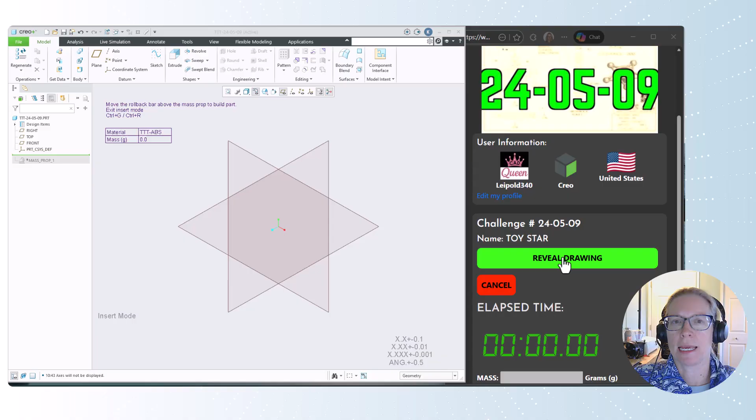Welcome back to another Too Tall Toby modeling challenge, and we are going to do this Toy Star. It is a tier 4 challenge. Let's jump right in. So today we are going to do an extrude, we're going to do a revolve, we're going to do a sweep, a mirror, and a pattern. A little bit of everything.

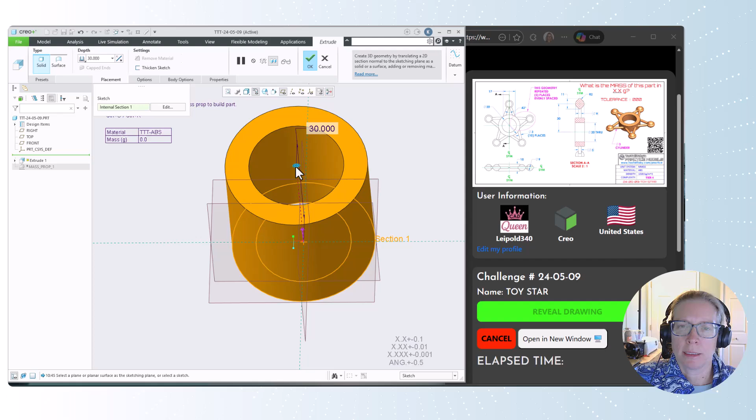So let's get our double circle shape here. The center is 20, the outside is 30. And let's make that a symmetric extrude of 10. That value is in my front view here.

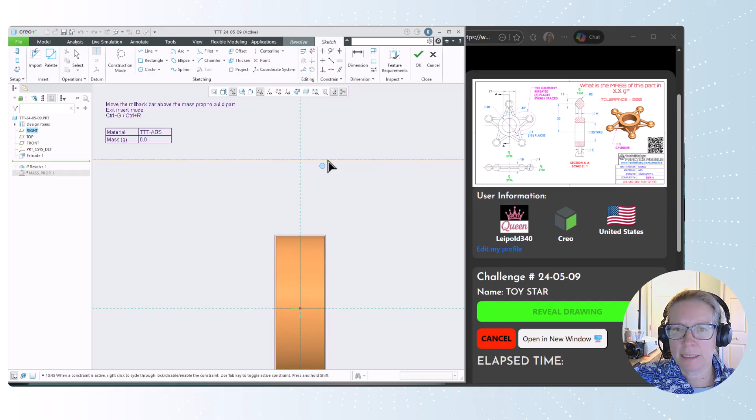And let's get into our revolve. So we're going to create a revolve on the right plane, cutting through here. And I'm going to use shift to drag and add my axis of revolution here horizontally above my horizontal axis by a distance of 30, shown out here on the right hand side. So that's my revolution. My geometry is going to be a circle with a diameter of 9.

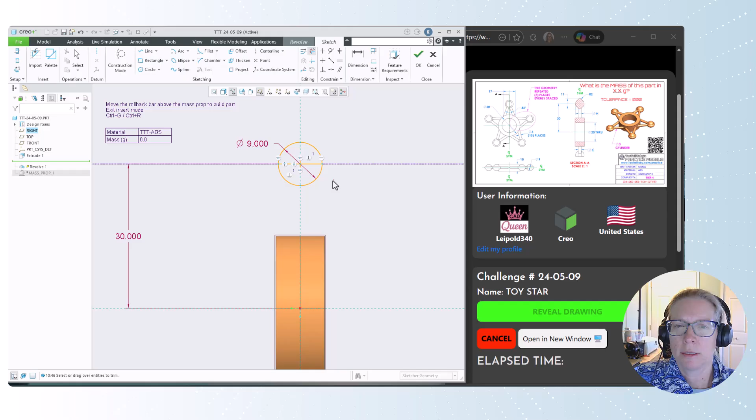I do have to close the loop with a single line, so we can do that. Trim off the bottom. And then I'm going to add a center point arc here to kind of get the geometry that I'm looking for. And I want the radius of that to be 2. I'm going to trim off the stuff on the inside. And the dimension that I'm looking for is 11. And 11 goes from this point out here to the opposite point.

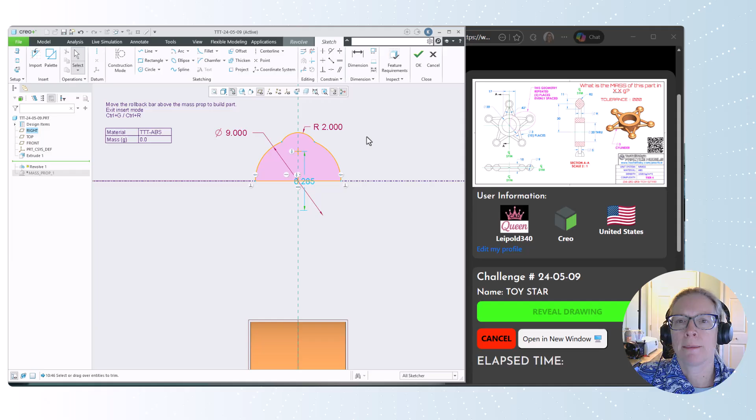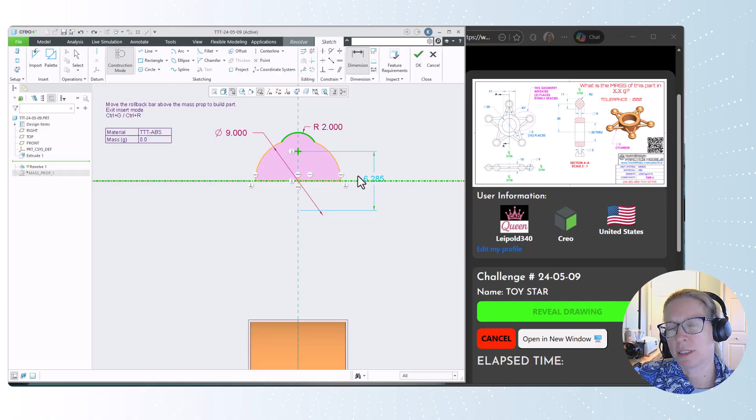So a couple of ways I can think about that. There is a way to dimension that. A lot of times it'll give you those diameters. But let's talk about what if we did a construction mirror. Oh, it didn't let me do it. I was hoping that would mirror in construction mode. Okay. Let's dimension from here to the center line. So that would give me essentially half the distance, but I want the full distance. So if I go back out and then middle click, I get the full distance. So you're kind of doubling your measurement selection. All right, so we got this great lemon Saturn looking shape here.

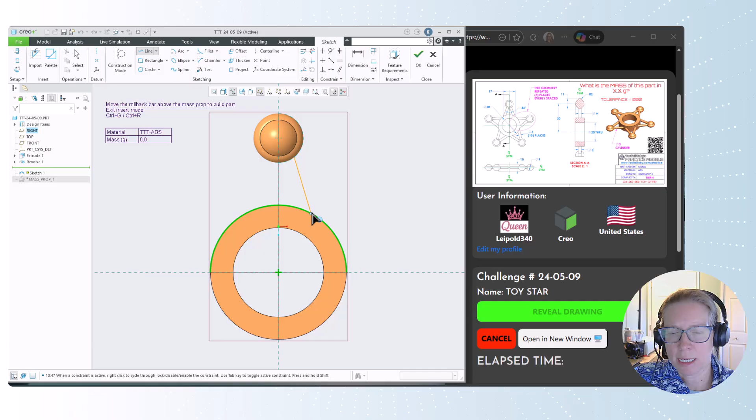All right, let's create our trajectory on the front plane for this sweep. And we know from the dimensions of the sweep, it's a line that goes from the top revolve to the extrude. The angle outside to outside is 42, so I'm going to make this 42 divided by 2. Okay, and then we know where it hits the extrude, we have this dimension of 17. So I'm going to go for my vertical reference to the outside and make this 17 divided by 2.

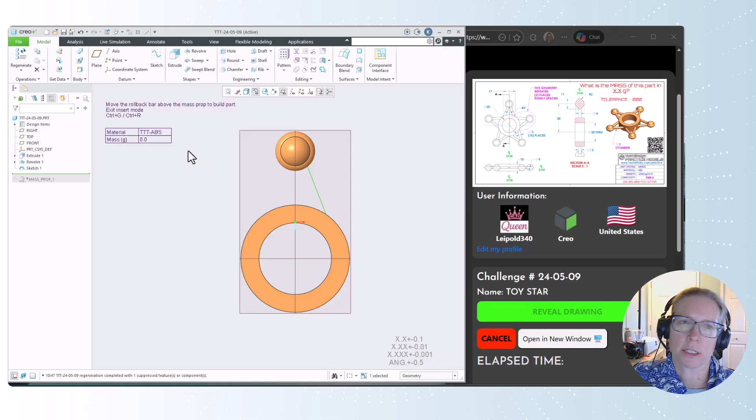Okay. All right, so as I get into using this path to make the leg of the star shape, that is going to be a sweep following this path. I want to flip the end. I want to sketch at the other end. So if I go details, options, I can hit flip here. That works. All right, and I'm going to create a sketch, and it's showing me exactly where that origin would be.

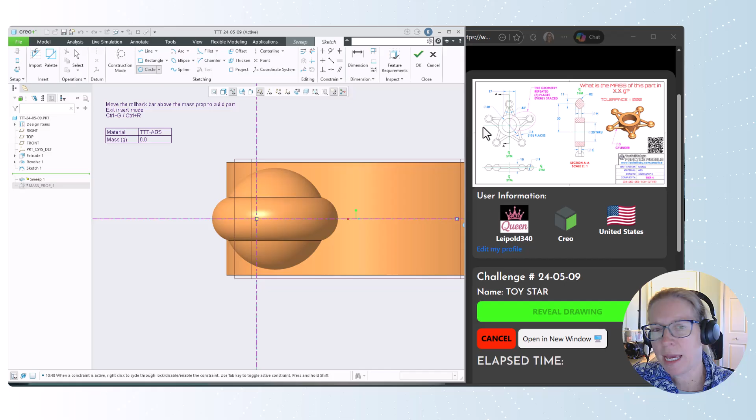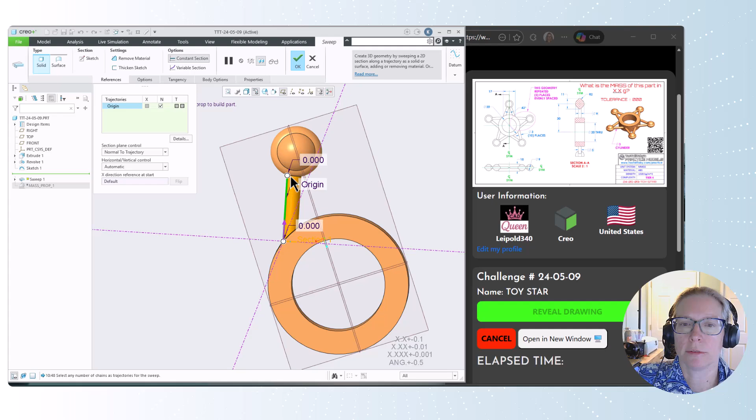Now remember, I drew the outer path, so I don't want to place this centered on it. I want to make it tangent with that diameter of 3, right? So it says here I've got a diameter of 3, but it's going to follow, you can kind of see a little better there, the outside of that path. Okay. So that looks pretty good. It's off a little bit though. It's challenging to see, but we have this little tiny kind of unfilled area up there.

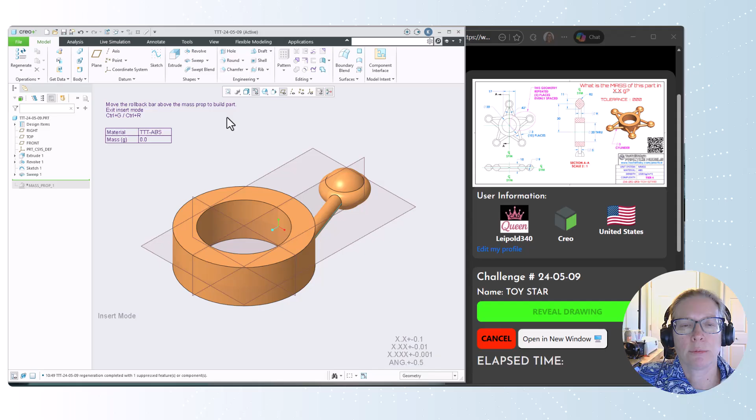So we have an option called merged ends, and merged ends extends your sweep shapes until they're wrapping around what they connect to. So that's what we want. Let's hit Control D. Okay, and we'll take that sweep and we will mirror that over the right plane.

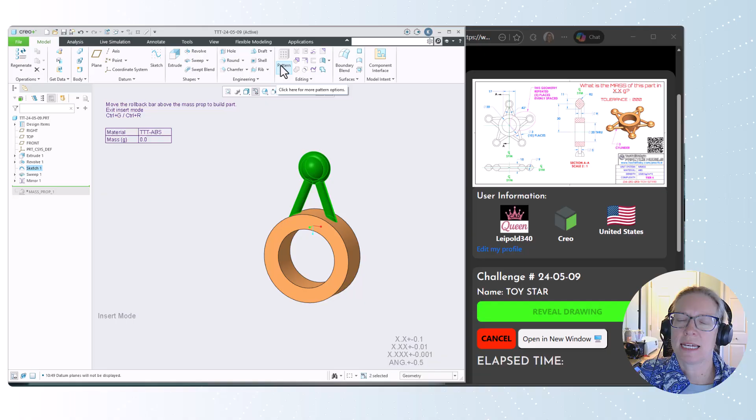All right, we're going to take a look at 2 different ways to create this pattern. So one, I'm going to hide my planes and I'm going to select the top geometry there. And notice that the pattern tool is not available because that creates patterns of a selected item. And this is multiple items. But I can do a geometry pattern, and geometry patterns are acceptable for geometry that's not going to vary a whole lot. So in this case, I can make 5 instances that fully go around 360 degrees.

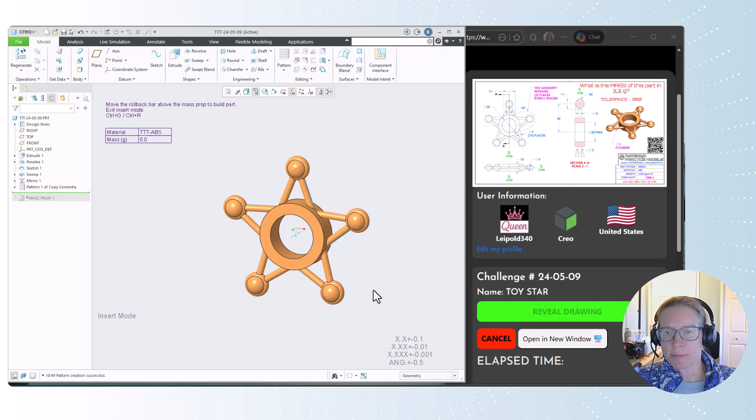Okay, so that is my end geometry. Let's see how we did. And we're going to type that in down here. And we did pretty good. Awesome.

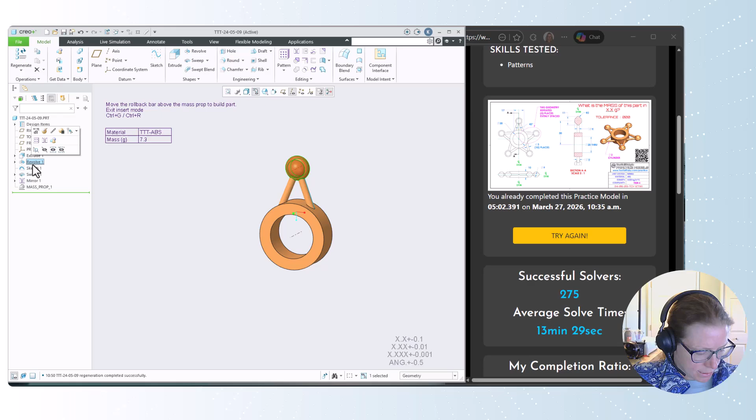So the other way to do it, if we want to use a pattern of a feature, which would give us something a little more stable, we can delete the pattern of copy geometry, although I do like how this leaves my original geometry existing. It's not considered part of the pattern. Okay. So again, the pattern requires multiple instances of a selected item. So right now, these are lots of things that went into that. So we have those 4 things that all went into making that geometry.

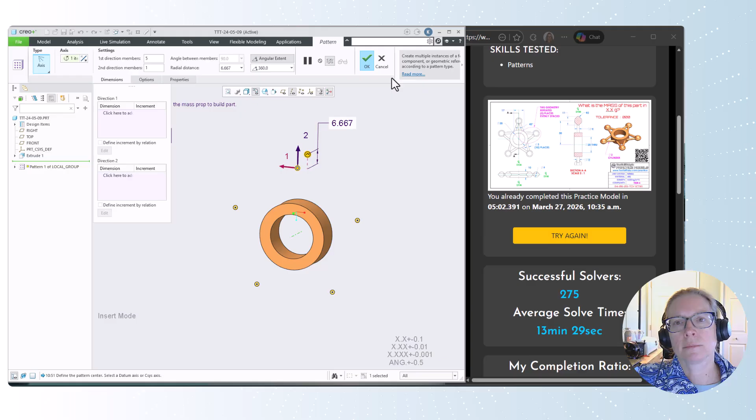So to pattern a selected item, what we do is group those. And that gives us a selected item that we are able to pattern. So we can now take this and pattern around that center axis. And we get the geometry. It looks identical. Confirm that that's the same. Yeah, no change there. So we get identical geometry, but this is going to be a little more robust. If we decide to change this extrude shape to something different, it would probably still function.

So we've got 2 different options there. Just remember, if you're doing a pattern of a feature, that it does need to be a single item, and you can kind of work around that by creating a group as your single item.